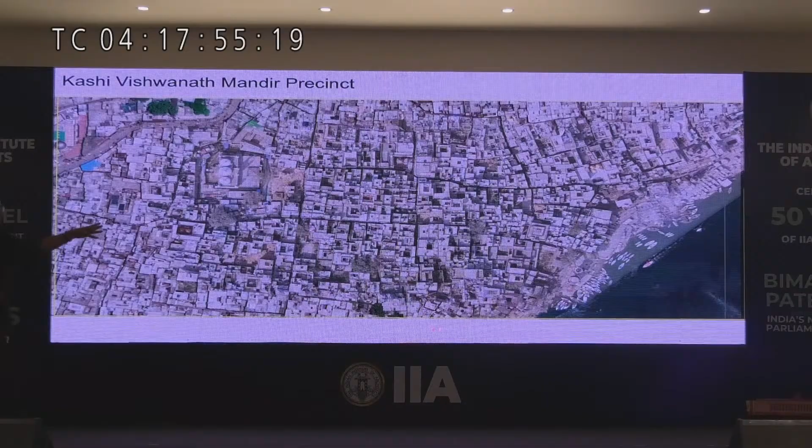That entire stretch is full of dense urban settlement. Now, this dense urban settlement, whenever people had to visit the mandir, they would come either from that street which you see on top, or they would come from these gullies which you can see. If they came by the river, they would come up on these small gullies coming all the way up. So this is a dense walled city type of settlement.

Here is an image, same thing. You can see the mosque, you can see the Gyanvapi Masjid there, you can see the Kashi Vishwanath Mandir down here. Unfortunately, I won't be able to point out to things here. And far there is the Manikarnika Ghat, which is the cremation ghat, which all of you know about. So these are the landmarks here.

This is a view, same view. You can see the masjid on the left hand side here. You can see the Ganges here, and that's the dense settlement that was there. Lots of people visit this mandir, as you all know, but in this dense settlement, dense area, it's more or less impossible for large numbers of people to move easily.

Here is another very important fact about this area. From the Ganges, you have to climb up almost 100 feet, and then you have to drop down 20 feet, and that's where the mandir is. So this is a climb up all the way. The mandir was never supposed to be connected to the river because it's on the other side of the hill, not on this side of the hill. However, there was a great desire to connect the mandir with the river.

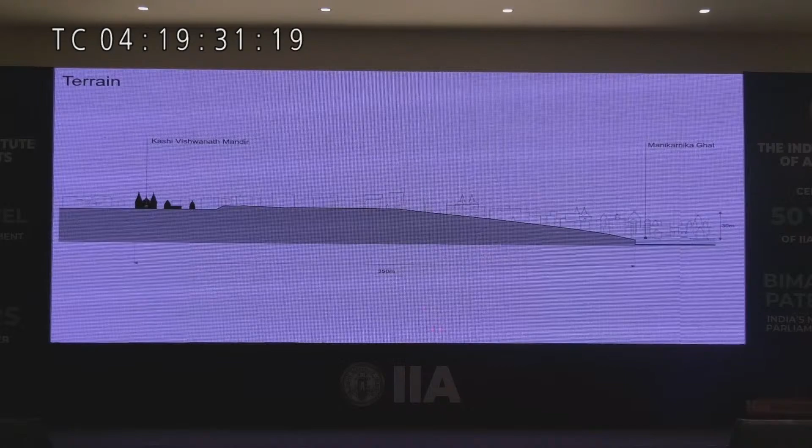It makes it very difficult for people to move. They are very crowded lanes, especially on festival days, it would get totally crowded.

There are lots of priests there, priests everywhere. And there are some high priests and some low priests, priests in the whole place. There are also some itinerant sadhus who are moving through the place. So there's lots of religious people there. Lots of pilgrims come there. And you know very well that this is a large, especially on special festivals, there'll be lots of people here. There's lots of tourists also who come here. That's an attraction for them.

And then there is the mandir, which is the most important aspect of that precinct. And in that area, this must have been the original magnet. You must remember, however, that most of the people living there are not the original residents of that area. Only those who are connected with the temple economy are living there. Most of the original owners have long gone away from the old city because there is very little infrastructure there, and it's really very difficult to live there. So most of the people who are living there are tenants, or they are encroachers in buildings. So this is the character of the people living there.

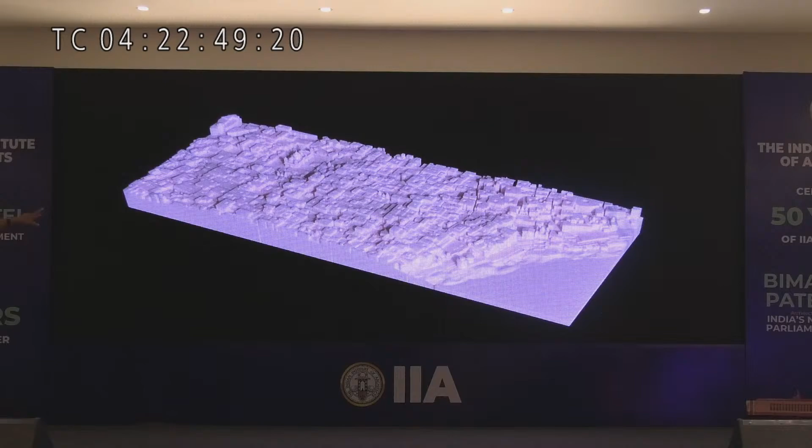And then when we first saw it, we started working on the master plan. This was the original condition in which we found the area, the precinct, and we made a quick 3D printed model of this to understand the area. You can see the river down below, this whole texture, and the mosque there, and this was the main objective here.

Of course, one starts working on sketches and drawings, and I want to say something about the design process at this point. The design process is about coming up with some proposal, then seeing how many faults it has, and then coming up with the second proposal, the third, the fourth, the fifth. This idea that architects sit and imagine a place is not true. Real architects go through an iterative process of coming up with proposal after proposal, criticizing it to find the mistakes, and finally the proposal that you can find no further mistakes with, at least at that point, you decide to agree on.

So the process is very important. In our office, we work like that. Somebody will draw up a sketch like this, it could be anybody. Then everybody stands around in a circle, criticizing it, not in a negative fashion but trying to find the faults in it, saying this is wrong, that won't work, this won't work. Then somebody has to come up with the next proposal, that's the creative portion, which answers some of those faults. Now there will be other faults that have crept in because of answering those, and you keep going through that process, many times.

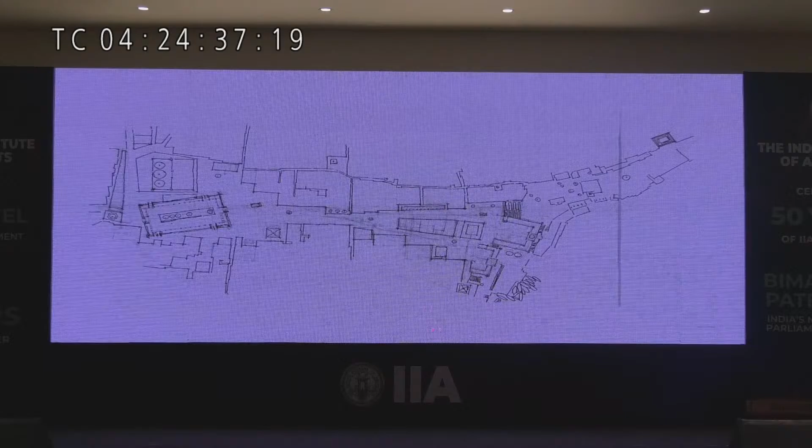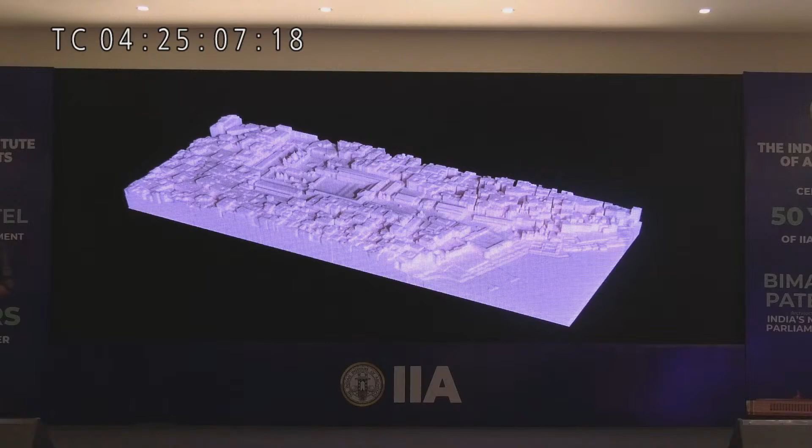Our idea was that we wanted to connect from the river to this place, creating a whole pathway up, and so many such sketches were drawn. Finally we came up with this version, which we'll call version 0. The basic idea was that the mosque was there, and around the temple we created an arcade and a civic plaza in front of it, then a pathway leading all the way down. We produced a model of it, and that's what it looked like, and that's what we got going on it.

But even then, this was our first master plan. Now other people involved in this project, the clients, have to get involved. When they get involved, there's lots of new discussion, so you have to go through the process again.

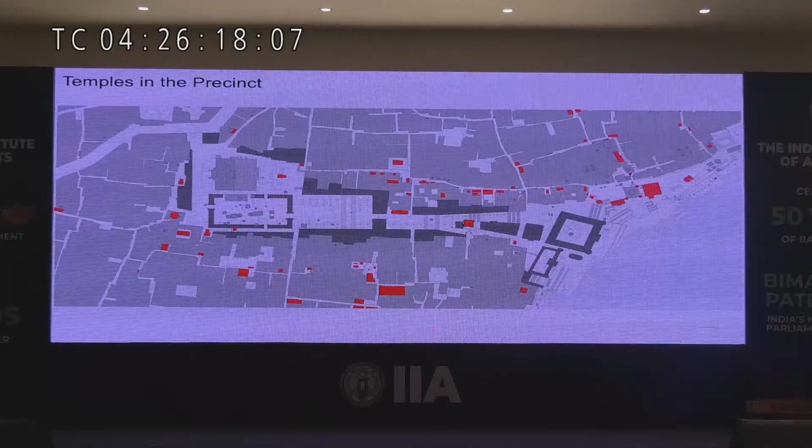So then the master plan had to change, and we came up with version 1. Then we started working with the team of people. There was a wonderful set of people from the Temple Trust and the commissioner there, one Mr. Deepak Agarwal, one Mr. Vishal Singh. They were terrific people, and we started evolving the master plan. You can see we had this, then again came up with the next one, and the next one, and the next one. Every time we are changing something. Now this is something important to keep in mind.

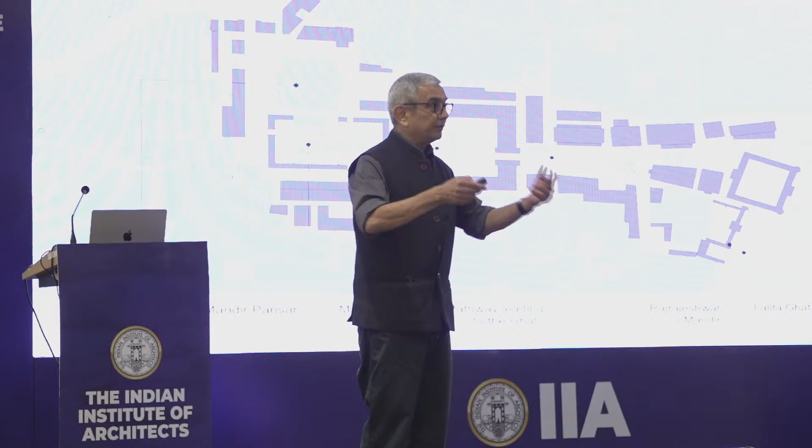An architect's design process is an iterative process of coming up with new proposals again and again. You don't wait till the last day. This whole idea that you analyze everything and then finally come up with a proposal is completely wrong, complete nonsense. Nobody works like that. You start designing on day one. That tells you what data you have to find and what analysis you have to do. As soon as that data and analysis is done, you come up with a second design, which tells you what more data and analysis you need. So this idea that you do a detailed study and analysis and then finally come up with a design at the end of the semester is nonsense. You have to start designing on day one.

With a Google image, you start. Say, let me just check. That will tell you what more data to look for. So this classic idea that you go step by step is completely nonsense.

Anyway, here this is version 5, version 6, and version 7. You can see a big jump from here to here, and then we made some large models like this, constantly trying to figure things out. This was an old building that existed here—not really a building, just a terrace overlooking the place. We were going to use that terrace.

At one point we decided, suppose we get rid of that, what could we do here. So we got rid of that building. You can see it near the ghat here, right near the river. You'll see more of this in detail afterwards, but this is how the master plan evolved—you can see here we removed that.

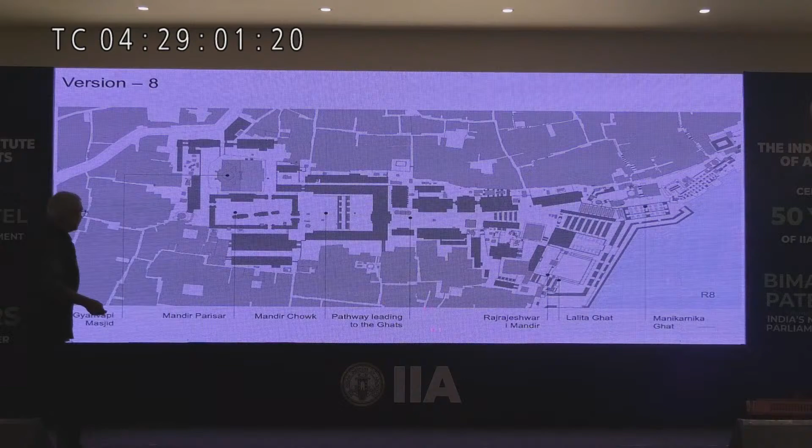Then we made a new model saying the pathway coming down could be much nicer and wider. You can see here it's very tortured—you go from here, past here, into this place. That's not going to work. So we said, how about doing it like this, with a grand set of steps going up.

Then this was removed, and we said, oh no, we could do even better than that. So this was the final version that actually got built. There was a long process of design evolution, and this was the final master plan that's built right now. Some of these versions of the master plan also happened while construction was going on, but that's the way it is.

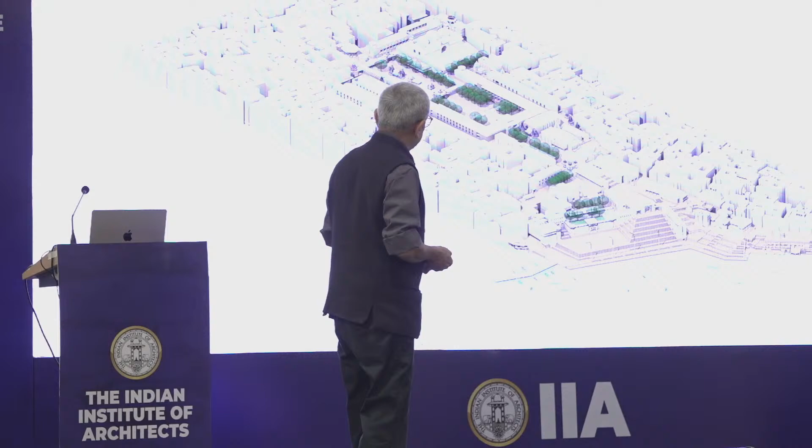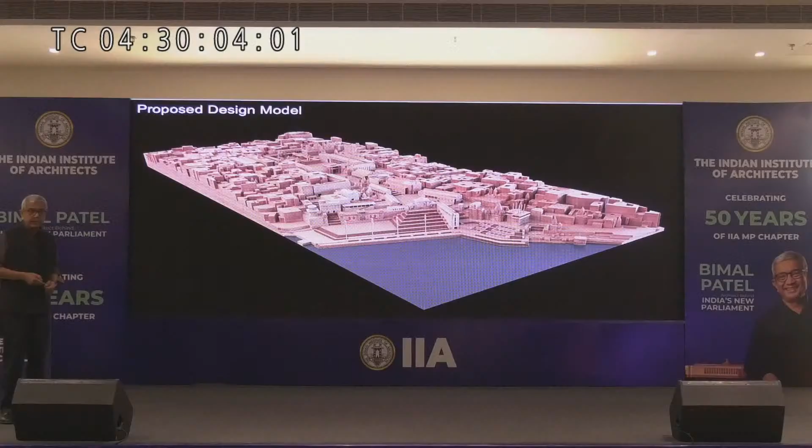And this is a sort of plan drawing of the whole thing. Here's another view of it. This is what it used to be like, and this is what has been proposed in its place. You can see this is a dense agglomeration of buildings near the river, and this is what has been proposed. Here the temple is right next to the mosque—you can see that, and you can see where it is. That's another model we made of this, just to get a sense of what was being done here. And that's the same model.

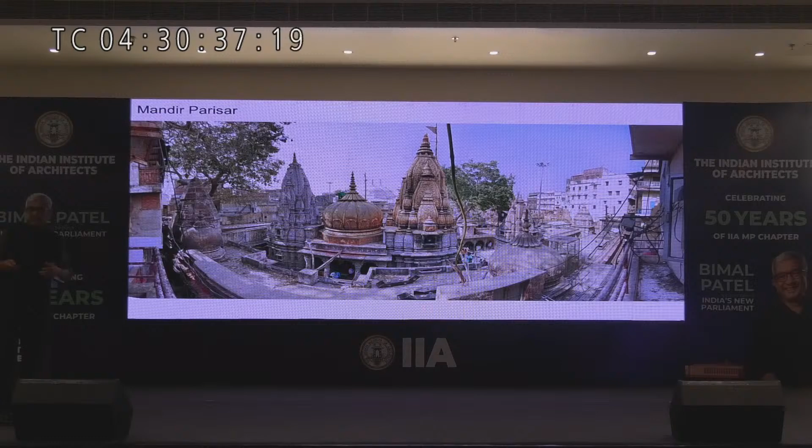Now let me explain the design to you in more detail. First is the Mandir Parisar—this is the area I'm talking about. As you can see, there was this temple, hemmed in on all sides by encroachment and development. There's hardly any space there, and lots of people come here. So we decided that, like many South Indian temples and other temples, we have a tradition of building an arcade all around, creating a sacred space around it. So we took that parisar here.

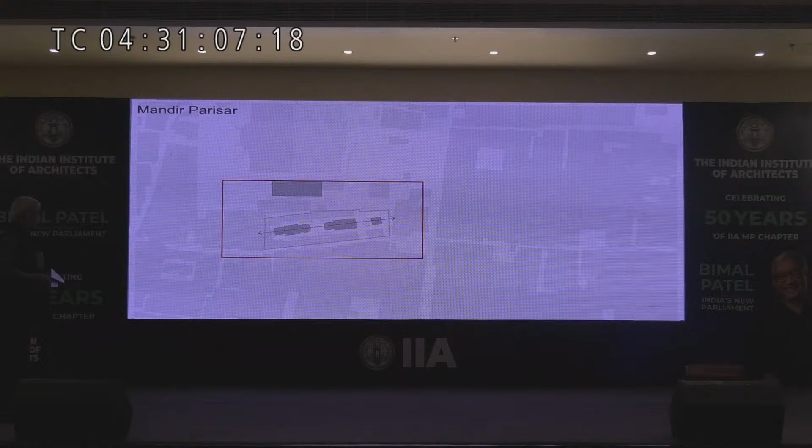You can see in more detail what it was like—this is what was the temple precinct at that time, a small one. We said that's the axis, we take this square here, and we straightened out those two squares. Now this is distorted, so in your mind you have to squeeze it down. We added this so we could take in the well that is there, and then we built a 75 meter by 42 meter arcade around it. It has 4 gates, as you can see—basically an arcade and gates all around.

While we designed the entire morphology, shape and size of this, and the whole concept, we decided to make the temple in a very traditional vocabulary. And traditional temple vocabulary is not something anybody in my office understands.

We would sit together and tell him what proportions we wanted, how we wanted the gate to be, etc. Together we worked out what that would be. You can see here the key plan below.

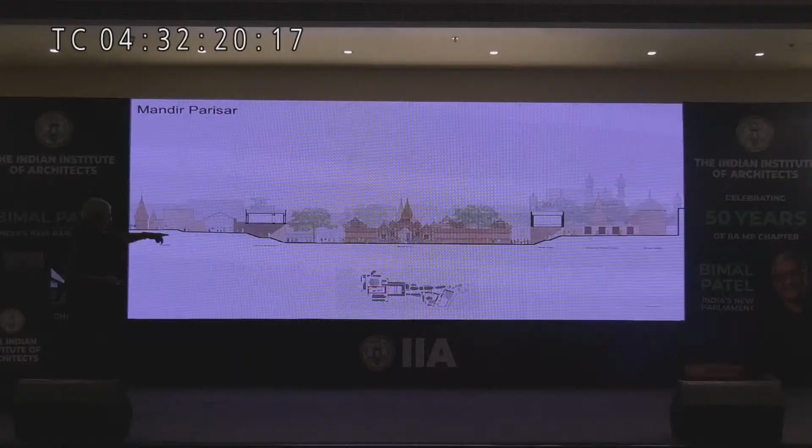So that's the temple inside, and this is the parisar around it. You can see the temple was opened up, and we have a space around it. That's the temple in there, and that's the arcade all around.

Outside the temple's sacred space, we decided to create a civic space. That's the space we're talking about, where people wait. Remember that 20-foot drop we talked about? So you're coming from the river, and you can see the steps here in between.

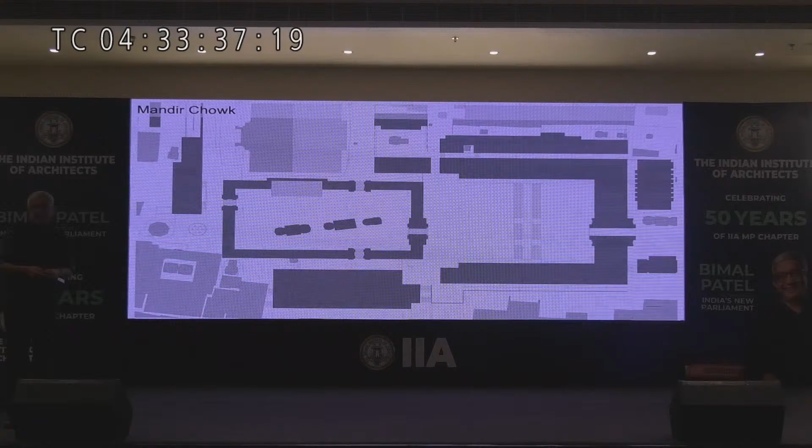So we took that and repeated it on the other side, and made a building around it that forms the negative space. Now, because you're students, let me say this: the space between buildings is more important than the building itself, because as soon as you place two or three buildings together, you have a possibility of shaping the space between them. Very often we forget that it's that negative space which has to be designed.

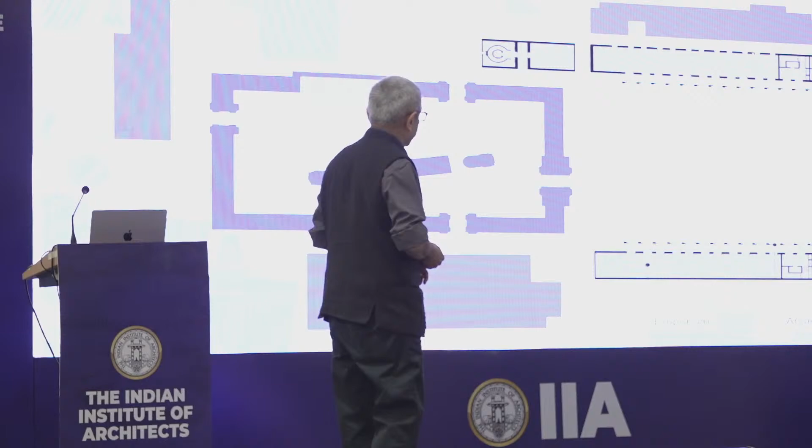That's the building, you can see the ground floor, the first floor, and the top floor. And you can see a section through here, stepping down, with the Mandir Parisar on the left-hand side. Okay, you come down here.

We decided to make this building fairly modern, but with some features connected to the traditional architecture. You can see this is the plaza in front, the civic space in front, and you can see that drop coming down.

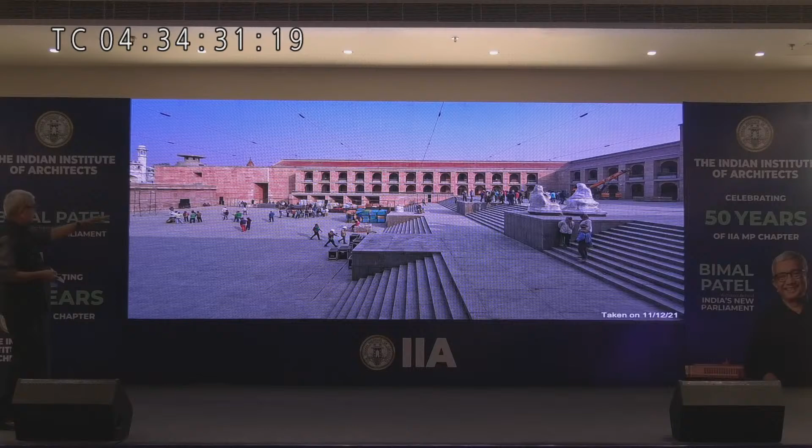This is during construction, so those sculptures are still not opened up. All those cables you see on top are the lighting we did. We didn't want to put poles from below, so we just hung cables across.

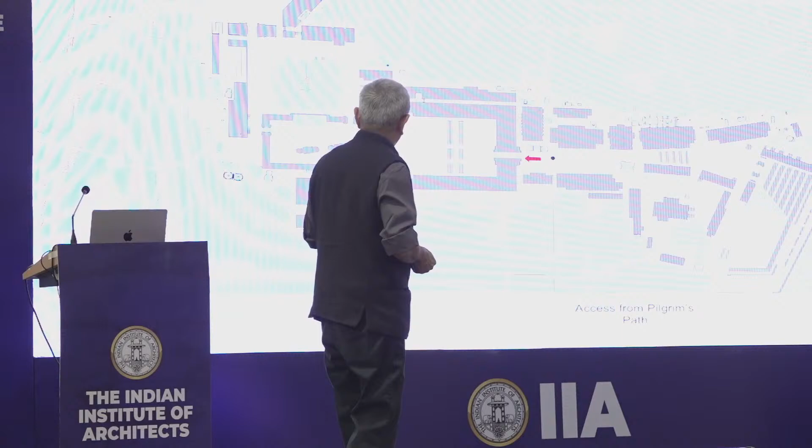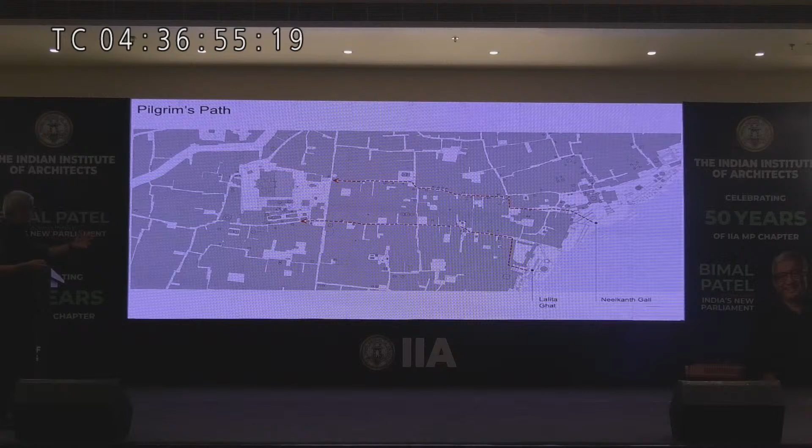Now, the important thing was to structure this whole route from the Ganges. If you came by boat and you came here, you went through these gullies. This was not a pleasant experience at all because these gullies had no infrastructure, they were crowded, messy, and quite dirty.

Essentially, you got down here and went up that Neelkanth Gali, that little gateway, and then into the gullies. Now, that was an experience, but it was not okay for large numbers of people to do that. And you came by boat - even where the boats parked, getting off was quite dangerous. So for older people, this was not a very easy thing to do.

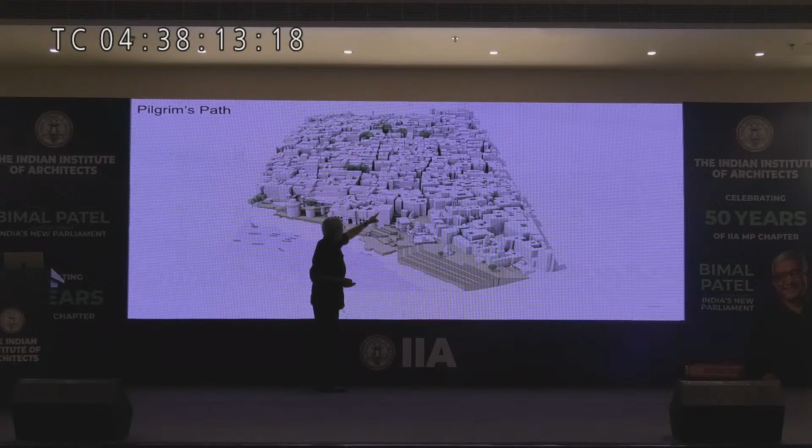So this was what it looked like before. As I told you, here you can see the sewage pumping station. You can see the older structure here, with encroachments on top. This was the gully that you went through.

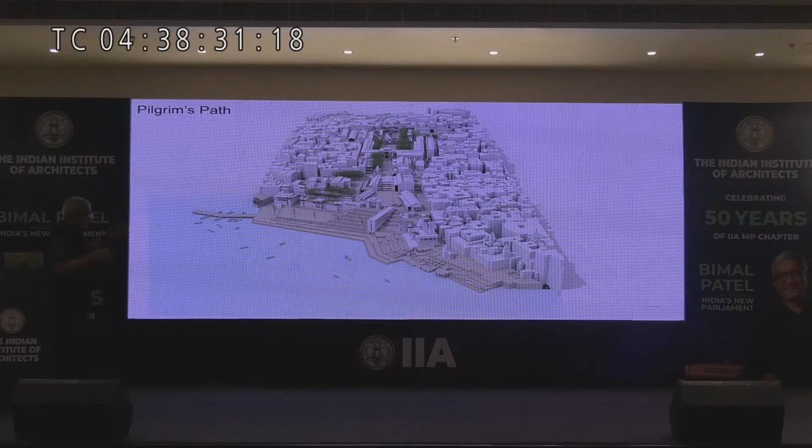So a lot of surgery was required, but this is what we proposed in its place. We said we'd remove the sewage pumping station, open up the building at the back, restore that building quite well. Here in front you can see we create a ghat that leads you up. This structure here is meant to give some privacy to the Manikarnika Ghat, and then you go up all the way.

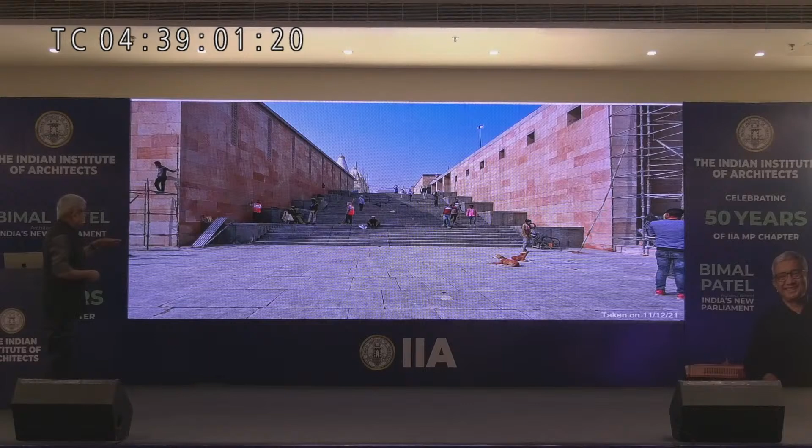These buildings along the route were cultural and civic institutions. So there's a hospice - people come here when they are terminally ill, and that's the last days they spend here. There was a small museum space, a spiritual gallery, a multi-purpose hall, a variety of functions were to be housed here. You can see that section going all the way up.

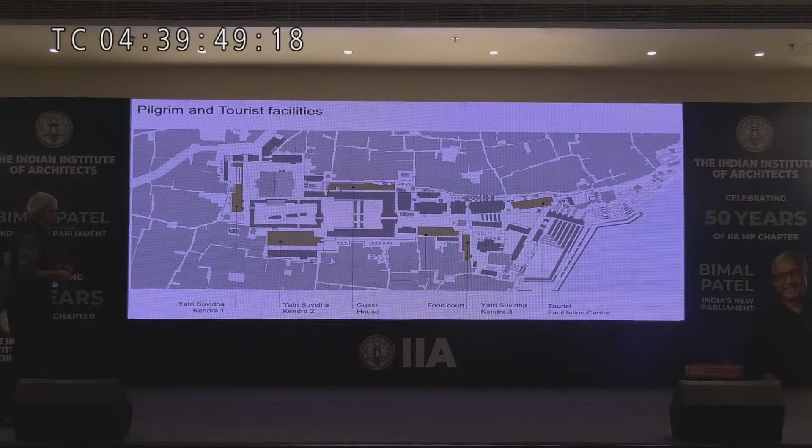There were lots of facilities for pilgrims and tourists that you can see here. Essentially, when people come, they need a place to keep their shoes and bags and mobile phones, etc. So a number of Suvidha Kendras had to be created, a guest house had to be made, a tourist facilitation center, a whole number of things had to be put in.

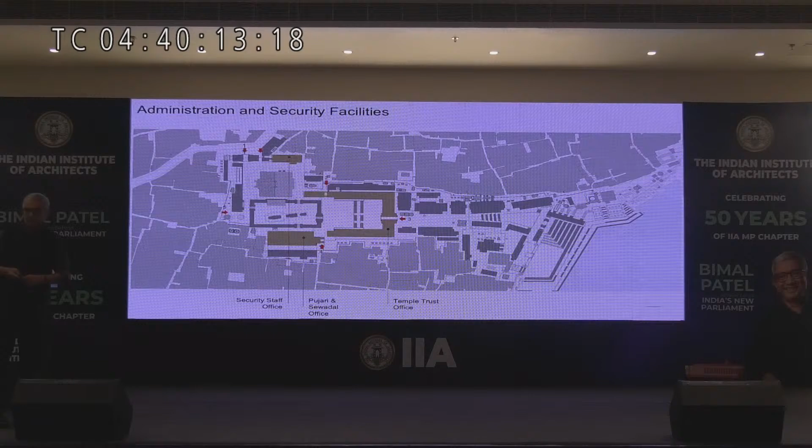And you can see that the whole idea is to place these buildings in such a way that you create a path that leads you up to this area. And these were all the buildings that were done. There were some administration facilities, the temple trust offices, and lots of security offices, etc. And finally, the ghats - so you can see the ghat here, that's Manikarnika, there's Lalita Ghat there.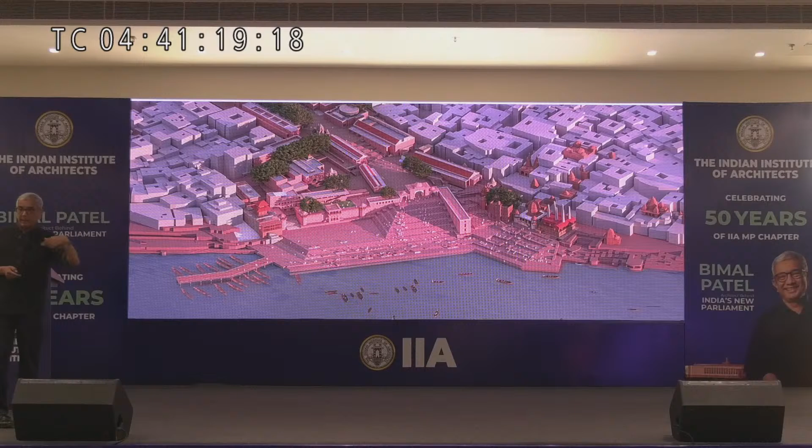Now our ambition was to turn it from that into this - you can see here the Manikarnika Ghat on the right hand side, and instead open up the place, create a big plaza in front, with sort of steps leading up to this place. That structure sticking out actually has a ramp, a wheelchair ramp inside it. So this was the idea, and we thought that once it's done like that, it would look quite grand.

This would become the entrance of the temple, because the temple cannot be seen from the river, nor can you see the river from the temple. So this would be the announcement of the temple.

As you can see, during the construction of this ghat, there was quite a massive effort to put all of this together, and finally that's what got built. Here you can see people climbing up - it's a huge achievement. And here's how it looks when it's lit up.

Yeah. So, thank you. So here it is.

You can see during the monsoon, the level of the Ganges goes up, and the steps are all flooded. You can see so much of it has got submerged, and the boats all come to a higher level. So all of this is below water at one point, and you can come directly to this level by boat at that time.

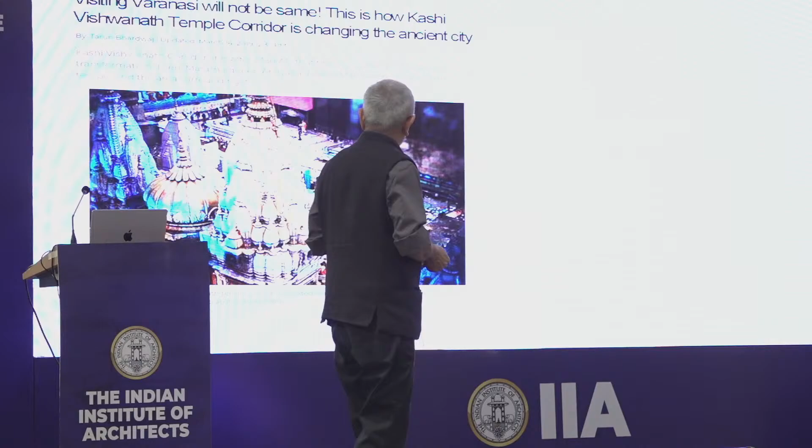Now, of course, this was an intensely political project, a very difficult project in some ways. As you can see, this was propelled by the Prime Minister, and he put his whole force behind this project. And of course there were many, many reactions to this - a lot of people were very upset, wondering whether this project would completely transform Varanasi and change its character.

In India, we are very, very poor at putting information about projects out into the public domain, and that is what often generates a lot of the negative discourse. Of course, projects like this are bound to have some opposition, but in any case, we kept doing surveys of people in the area to find out what they were saying.

There were people who were clearly upset by the changes to the area - some didn't want to leave, some wanted to leave. Here you have Vishal Singh, the CEO, the person who first got the project going - by the way, he's the one who later did the Ayodhya work. You can see various people talking about it.

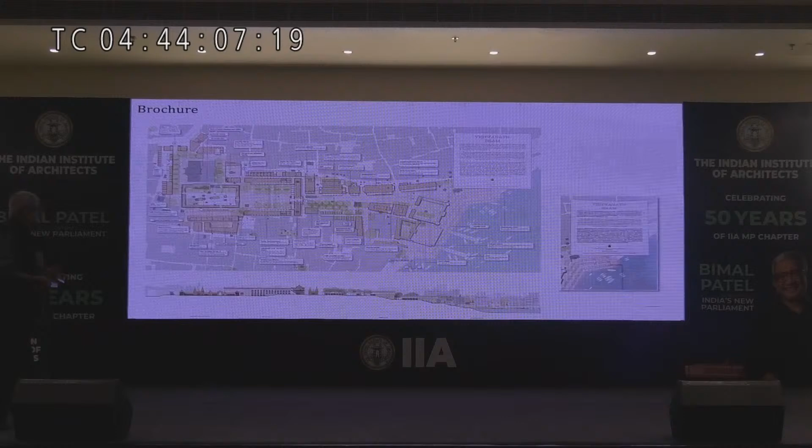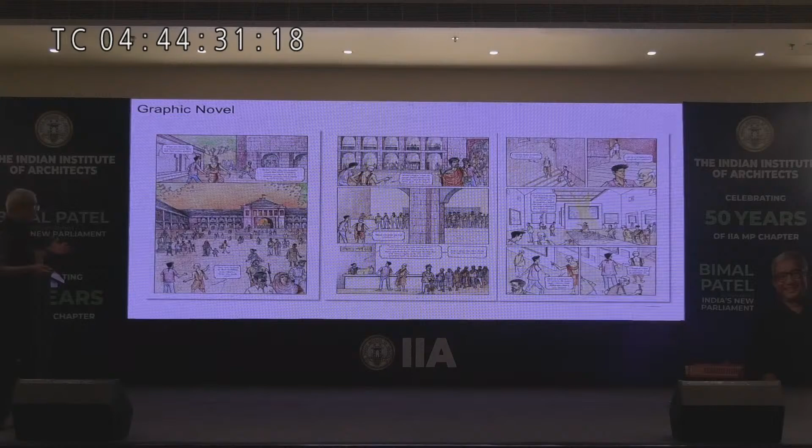So we made our own attempts to explain the project, but it was a lot more difficult. In all our public projects, we make our own effort to put material out - through brochures, exhibitions, films, and we even made a comic book explaining the project. It shows the problem, a young man who goes to see Kashi and finds all this mess, then goes to the other side, takes a dip, and the whole thing has changed. This was also kind of fun to see.

First, the houses in this area had to be purchased, all done by the temple trust. They purchased 300 houses - as I told you, most were owned by absentee landlords who were very happy to sell with the tenant included. The tenants were given a lot of money in compensation, or an alternative accommodation if they wanted. Almost everybody wanted money - not everyone was pleased with this move, but the vast majority were quite happy to take the money and get something better.

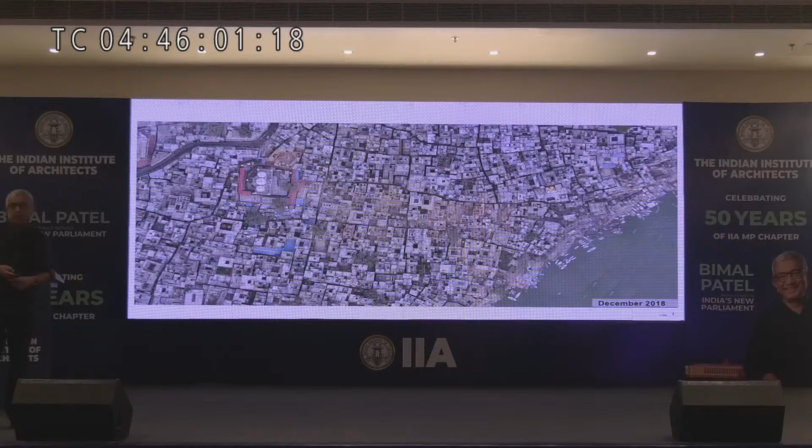Almost 400 crores was spent over 300 houses - that's a lot of money per house, as you can see. There were still some people who really would not want to move because they were tied to the temple economy, but that is the nature of such developments.

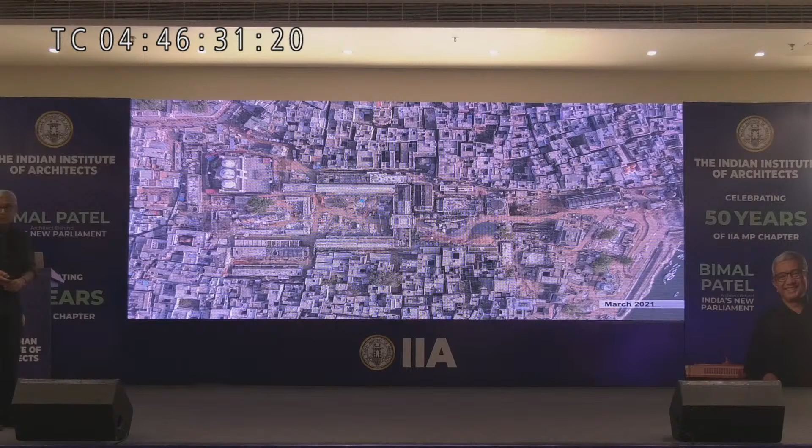You can see January 2019, more demolition, the site being created. Here's March 2019, more demolition. Now construction has started, October 2020. March 2021, construction ongoing - this was quite a massive, incredible site. September 2021, October 2021, still getting constructed, nearing completion. December 2021, and there you are, finally this got done. The ghat was built afterwards, after the inauguration of the temple. Here's some more images of it.

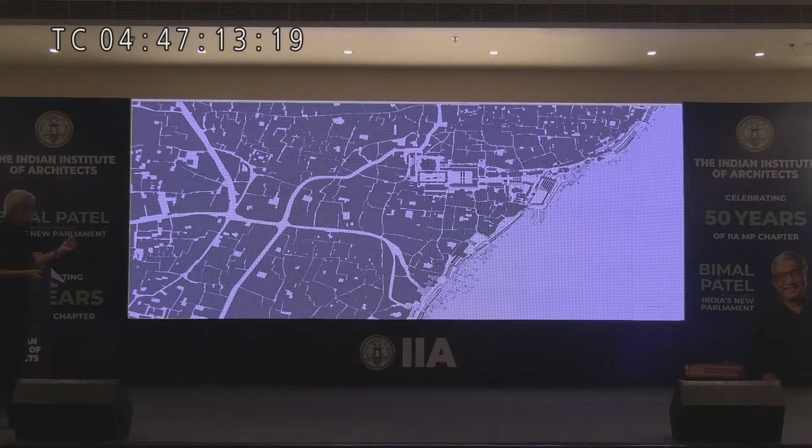It's a project of much significance for Varanasi. But at another level, it's actually a very small thing that you're doing. To get a sense of it, this is what it was, this is what it became. In that whole settlement, this is just about 80,000 square meter area. If you zoom up, it's actually almost invisible in all of Varanasi, but you can see that it's here.

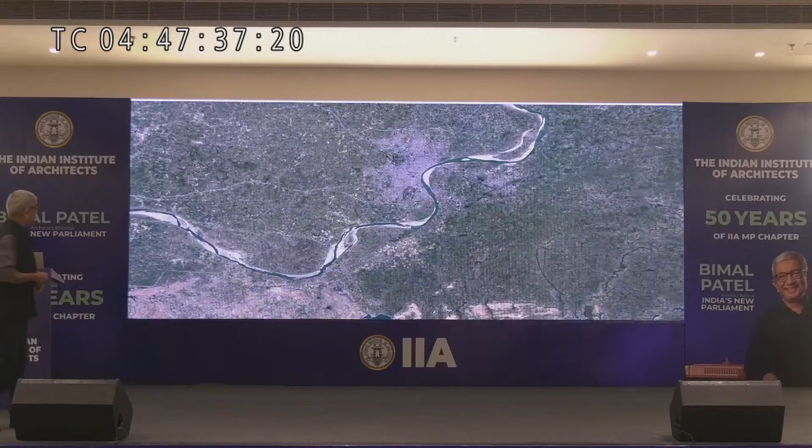Okay, so that's one project. If you have questions.

So can we do the questions of this project first? Maybe that's better, and then... Okay, they want me to do both presentations, so I'll do both presentations and then we'll take questions.

Okay, this one is work that gets done in our urbanism studio, and this is some food for thought for all of you, and especially for the architects, practicing people who are here.

Okay, I'm going to talk about the waste of land in Indian cities. You probably haven't thought about this, but Indian cities are terrific in the amount of land we waste. What do I mean by this? My proposition is the following: that Indian towns and cities waste a lot of land.

Now let's take Ahmedabad. That's a view of Ahmedabad. You can see the riverfront on the left-hand side, the Charles Correa Stadium here, and the metro line in the middle. So it's bang in the middle of the city we are talking about. In the map of Ahmedabad, that red spot is the area I'm talking about, in the middle of Ahmedabad.

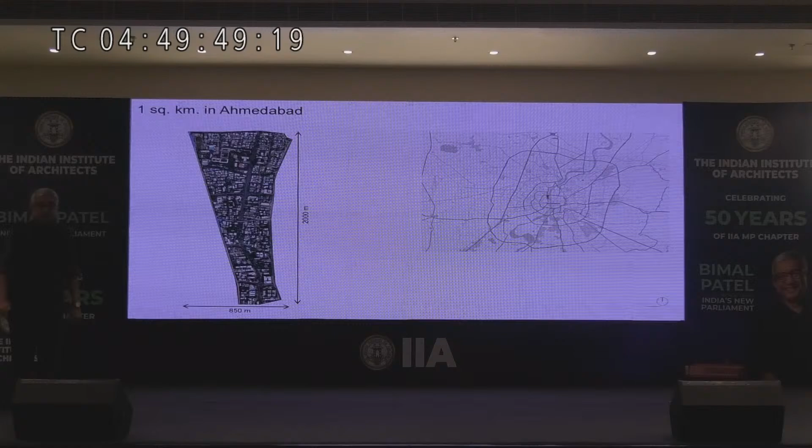When you ask a planner, they'll give you all these things about residential, commercial, this, that, all. That's complete nonsense. Throw it out of the window. You should not even bother with that. Planners shouldn't be doing it, we shouldn't be doing it. If you want to ask land use, you must divide the land use into 3 categories.

The first category of land use is the public realm. Ask a simple question: how much of land is in the public realm? By public realm, I mean streets and parks, that's publicly accessible. Now you would all want more streets and more parks, because that's where we spend a lot of time, and if you have more streets, then your traffic will move better. I saw that Bhopal does not have that much of a traffic issue, but as you grow and get more vehicles, it will become more and more important to have enough land in streets.

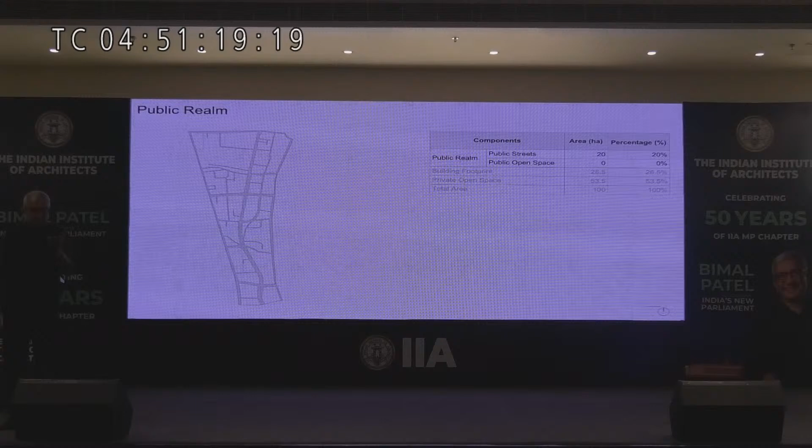Now in Ahmedabad, in this 1 square kilometer, there's no parks, and if you look at the public right of way, 20% of land is used in streets. I don't think this number will change much across any city in India. Anywhere you go in India, they'll tell you 18, 19, 20% of land is in streets, and parks might be 2, 3, 4% in most cities. So we put 20%, and the important thing to keep in mind is that this is the quantity you want to maximize, because the more land there is in streets and parks, the better the city will be. In the case of Ahmedabad, you have 20%. The second category is how much building cover you have.

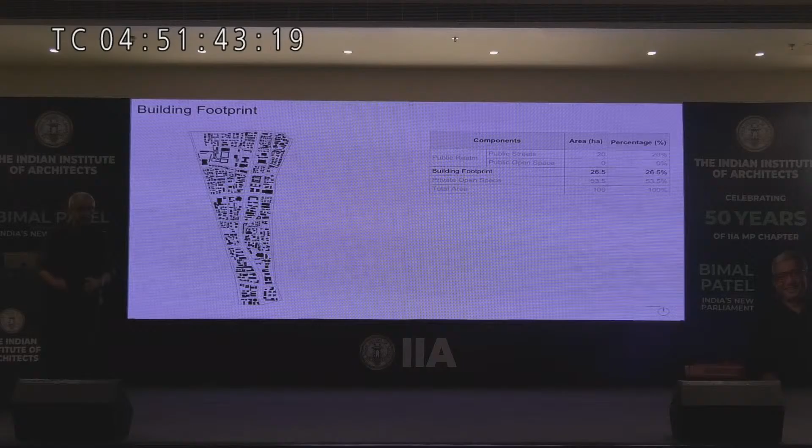By building cover, I mean how much land has been covered up by buildings, the footprint of the building. Why is this important? It's important for 2 or 3 reasons.

One, it tells you how much ground floor space there is in the city. Very immediately, the amount of footprint, building cover, is the amount of ground floor space. Now, ground floor space is something all of us value highly. We want to use it. Why? Because it has a special relationship to the ground, and unlike any other floor, this is the most important floor space. That is why its price is almost always high. So whatever people want a lot of, you should try to maximize. Building cover is something you should maximize just because it's something people really want.

In the case of Ahmedabad, the building cover here is 26%.

Another reason you want more building cover is that the more ground floor space you have, the more floor space you're able to stack up in 1 square kilometer without going too tall. And going too tall is costly, and environmentally costlier too, since you'll have to cool the buildings a lot more. If you're below the treetops, say you want only 5 floors, and you have more floor space on the ground, then in 5 floors you'll stack up more. In a city, people don't want land, they want floor space, because that's the important thing, and you want to maximize the amount of floor space in a city. The more you put into 1 square kilometer, the less you'll have to spread the city out. So if you want compact cities, you also want more building cover.

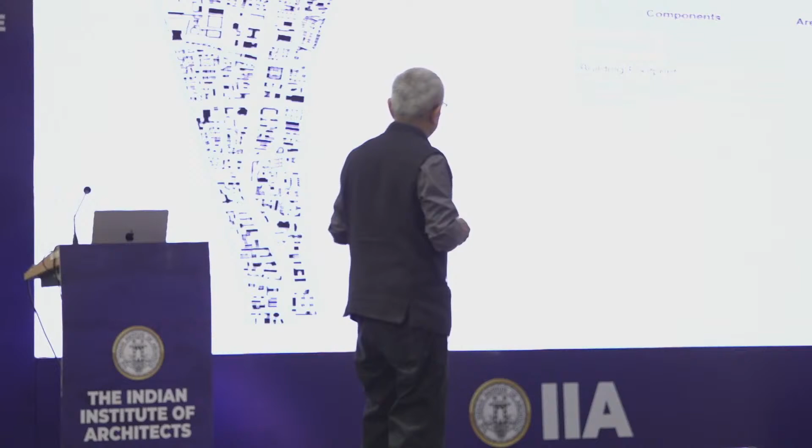So what happens to the remaining 53%? That's over half the land. Over half the land is a very familiar Indian phenomenon — it's the land around buildings inside compound walls. Most of it is left like that because bylaws require you to leave it open. You cannot use it, otherwise people will cover it up with buildings.

So this land is over half. It can be used by the private landowner. It's not publicly accessible, so the public doesn't benefit from it. The private fellow benefits, but does he really? It's open land within compounds, required by regulations. Much of it is very narrow, much of it is not properly shaped, because you cannot shape land properly like this. It can only be used very poorly. And that is what I call the waste of Indian cities — land that's open, cut up into small pieces, fragmented, and over half our land cannot be used very well.

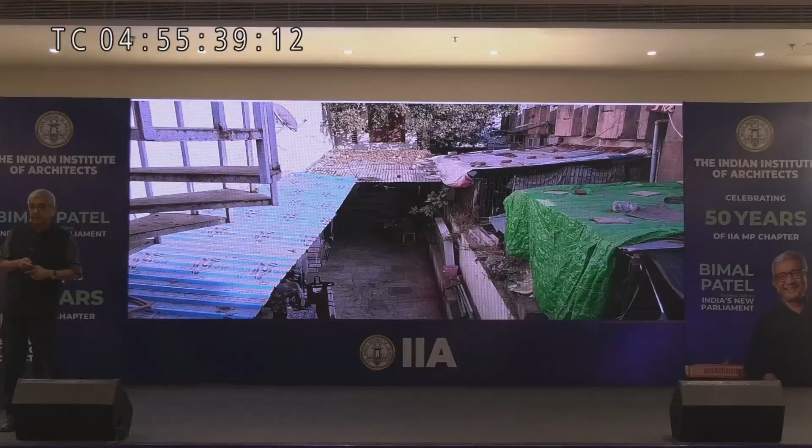So you see, if you look at a view like that, that's the shape of all of that land. And most of it, when it is used, is used in this manner — between 2 buildings, people try to use it in some way, but they can't really use it well. They use it for some storage. You can hardly grow any trees here. So who this is useful for is a question you keep asking. The front margin, neither belonging to the road nor to the building, you can't really use it well. You make some steps, landscape people do something, but it doesn't really work — little patches of land where cars get parked. This is all fragmented land, and it amounts to more than half.

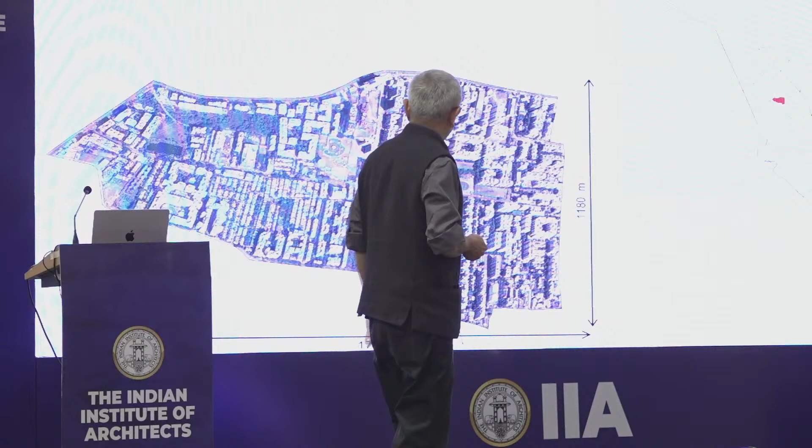Private open space is 62%, and this is all fragmented land there, not much use. If you take Pune, 1 square kilometer in Pune, you have 13% in streets, 30% in building footprints, and 57% in all this space around. Think about it—how much land is suboptimally used?

If you take Jabalpur, you get the same story: 21% in streets, 30% in building cover, and 49-50% in residual space. So it is fair to say that in Indian cities, land use is as follows—don't ever bother with residential, commercial categories, that's traditional junk which has been coming down and you might as well get rid of it. You get 20-25% in public realm, 20-25% in building footprint, and 50-60% in residual space. This is what you have.

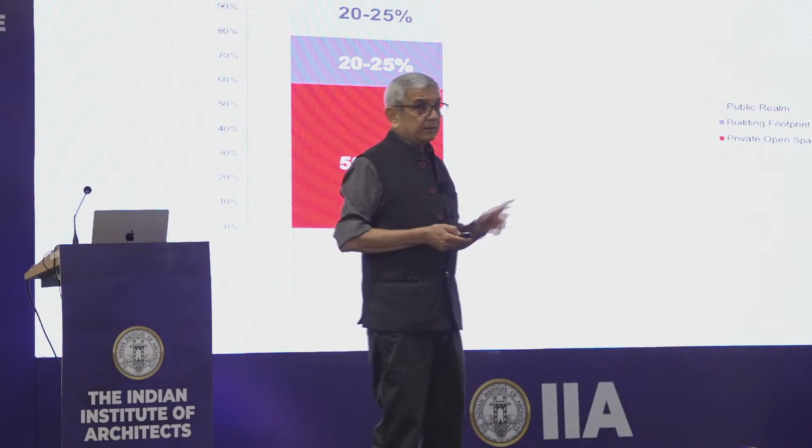Now, well-functioning cities abroad are very different. Take New York—it's a very dense city. In 1 square kilometer in New York, guess what? It has 45% in streets and parks, twice what we have. It has 46% in building cover and only 8% in residual open space. They use land very, very efficiently.

San Francisco has got nothing to do with high-rise or low-rise. If you take the in-between area, between high-rise and low-rise, it's 35% in streets and parks, 55% in building cover, and 9% in space between buildings. If you take Hong Kong, it's the same sort of story—35%, 48% in building cover, 16%. This is hilly terrain, that's why it's 16, otherwise it would be less.

This is a lovely low-rise city. You can see in this entire low-rise city, you have 39-40% in streets and parks. Building footprint has 40%, 19% in open spaces, and all those open spaces are well-shaped—you can see they're all in the middle of blocks, larger spaces.

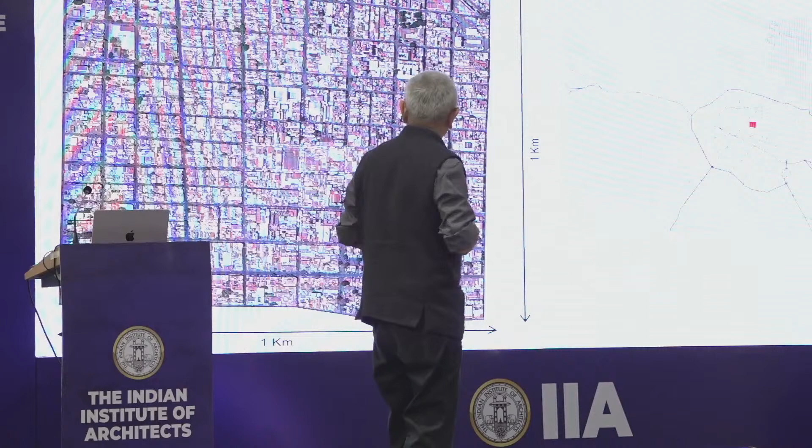It's got nothing to do with rich or poor. This is Mexico, a very, very poor neighborhood. You can see it looks like this—ground plus 2, but very efficiently packing 26% in streets, 69% in building footprints, and only 4.8% left over.

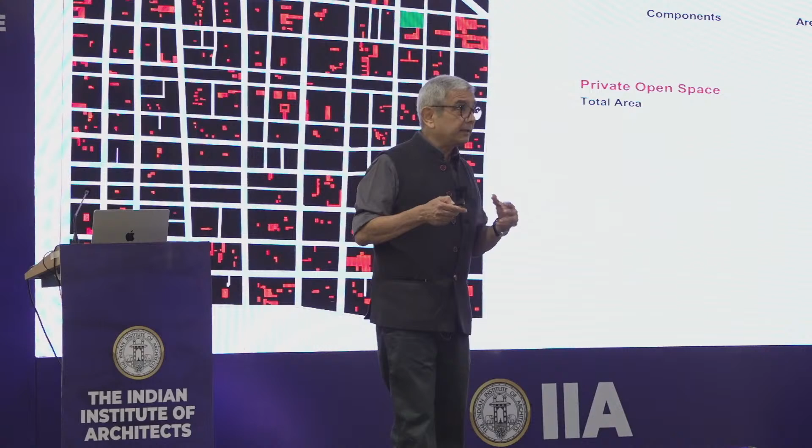If we use land at the current rate, our cities will expand a lot more. If we were to use it more efficiently, they won't expand. So Bhopal will start cutting out its forests much faster if it has this pattern of land use.

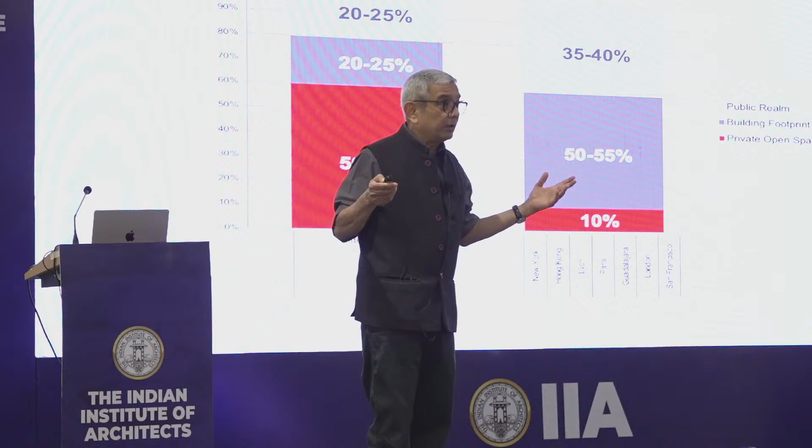So we can say that in well-functioning cities, 35-40% is in the public realm. No wonder their streets and parks seem very nice. How many of you have been abroad? Quite a few of you have. So when you go to cities abroad, you might even have seen them on film—there's great streets, there's great...

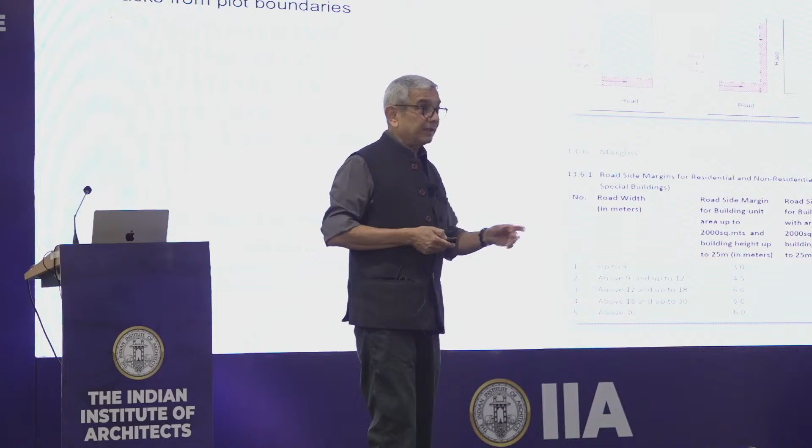What causes the waste of land? Indian planning—you have building bylaws. These are Gujarat building bylaws, and architects are required to design according to these rules. These rules require you to leave land open inside your plot for a variety of reasons. From plot boundaries, you're supposed to leave setbacks. Sometimes they depend on the height of the building, sometimes on the width of the street. You ask me why, and if you can answer why this makes any sense, there's an award for you. But they require all sorts of margins.

Setbacks from other buildings—if you have a large plot with two buildings, they'll say you must put 12 meters between them. Then, if there's a nala passing by, they'll say we've got to leave space from the nala or from the river. Then, inside the plot, if you have a road, they will tell you how much road to leave, as if you will deliberately not leave a road that is needed by you.

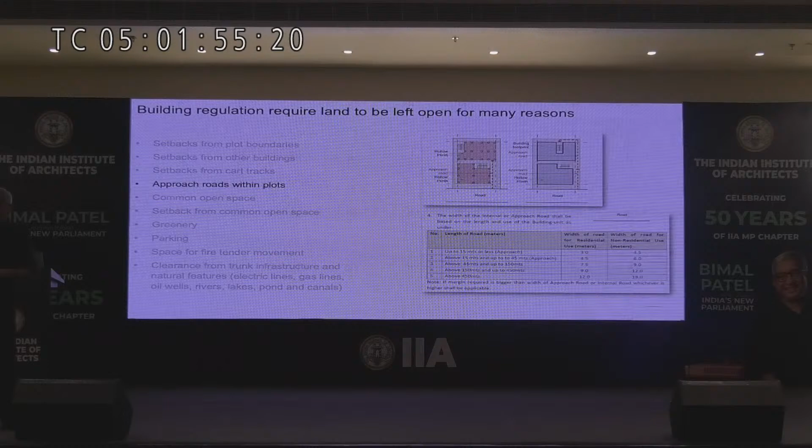Then they will require you to put some common open space. What planners and government should worry about is public space, not what you do inside your plot. Inside your plot, you may leave open space or may not, but you must have more land overall. Setback from common open space, greenery—sometimes bylaws require you to leave some space open for greenery.

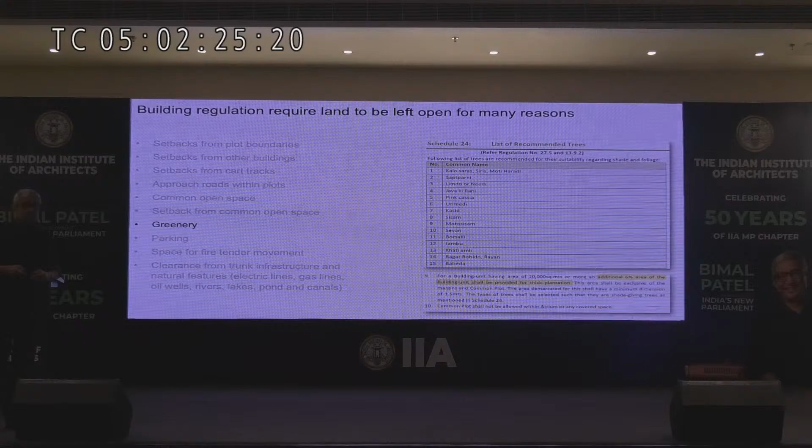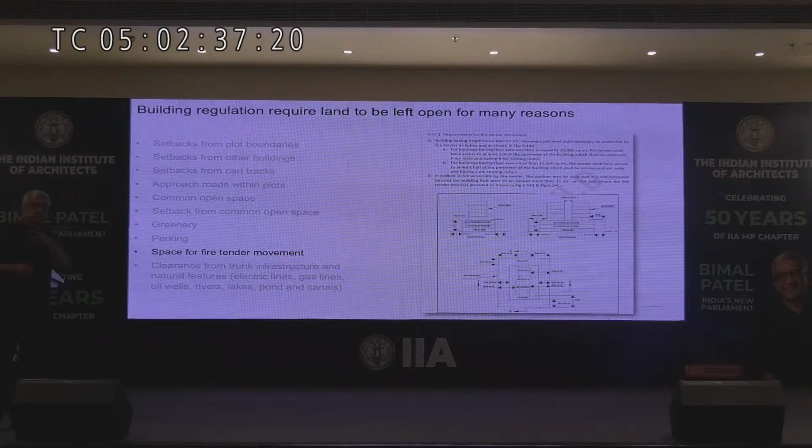Come along, man, just make parks instead of doing this. Okay? Parking, fire tender movement - this is another funny one, because you leave all this space, and it almost always is full of parking, so there's no way a fire tender will ever be able to move. And clearance from trunk infrastructure, that's another reason. Now, sometimes, as if this were not enough, even the coverage is restricted, and we take great pride in saying that there is very little coverage.

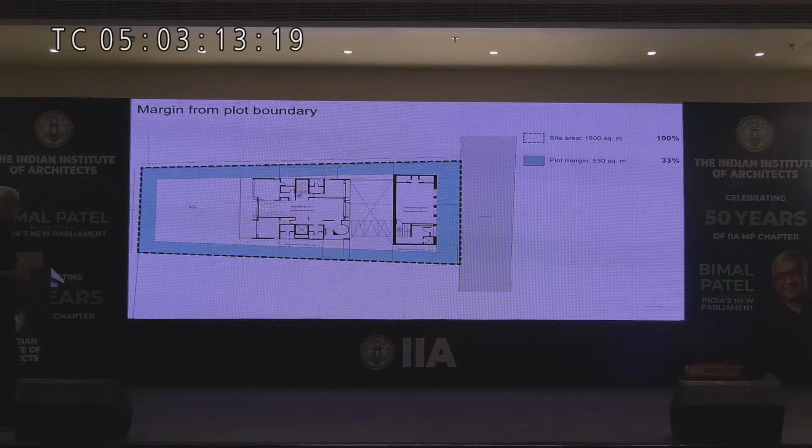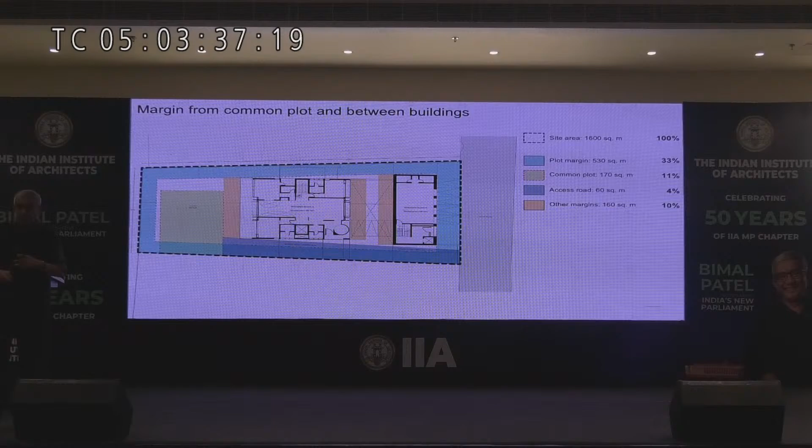Now how do these play out on a plot? This is the case of Ahmedabad. Here is a house that we designed, and this is what the house design looks like. It looks nice, khulla khulla, but that's not because he wanted it - it's because, from the 100% plot, 33% went away first in margins. Then we had to leave some common open plot, so another 11% gone. We tried to overlap as much as possible. Then an approach road had to be given, and we overlapped it with the margin, so we managed to get 4% more. Then some space has to be left between open, and after all of this, some parking space had to be provided.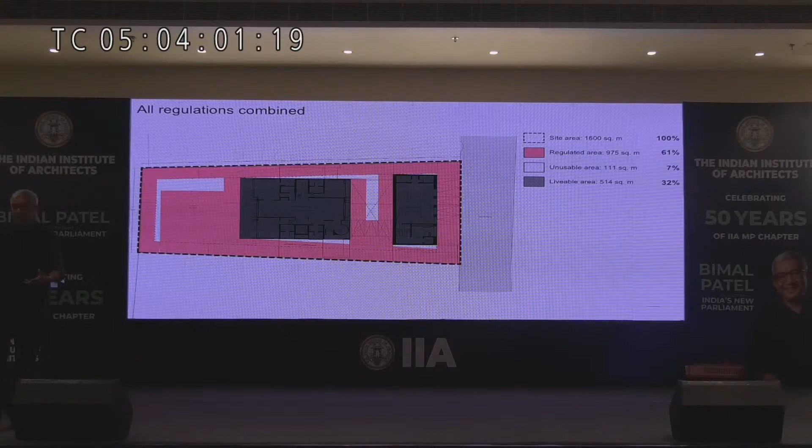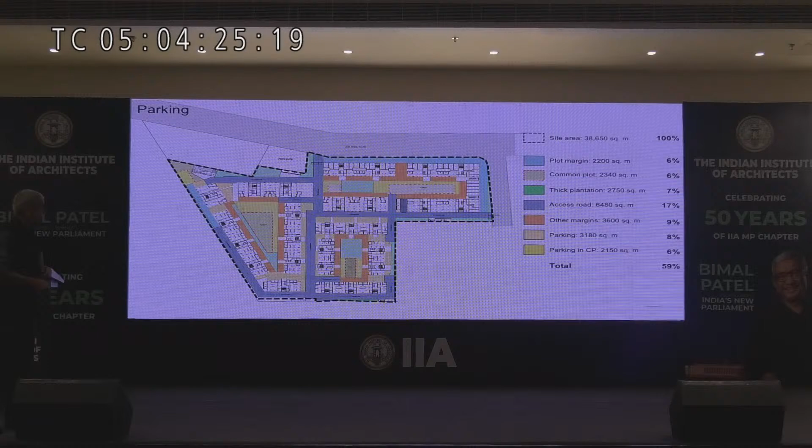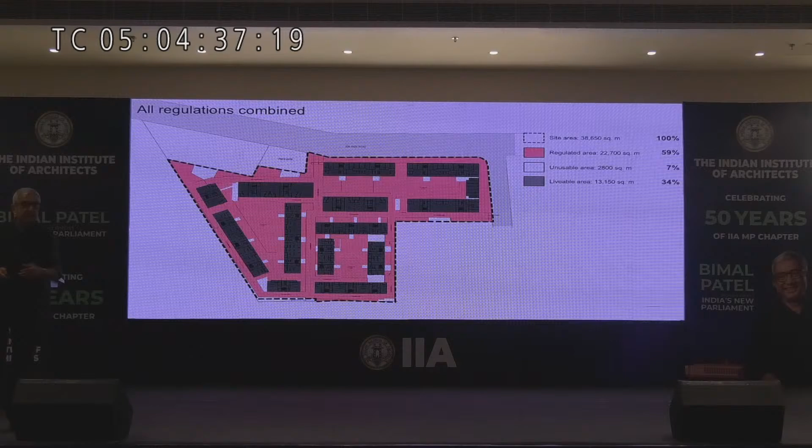Now, I'm not saying all of this is a waste, but I think there has to be a better way of doing this. One way or the other, this is not working.

Now architects have become like lawyers. They have to read these complicated building bylaws, find some loopholes, try to exploit loopholes. You must know all these detailed regulations. Loopholes have to be found. Find some convoluted shape that will fit inside these loopholes and the bylaws. Our creativity is used entirely in managing regulations, not in actually designing buildings.

This is completely nonsense, and this is a creation of Indian planning. It's got nothing to do with reality, because the world over, people make buildings and they have the same problem. They also have fire problems, they also have light and ventilation problems, they also have traffic problems, they also have parking problems.

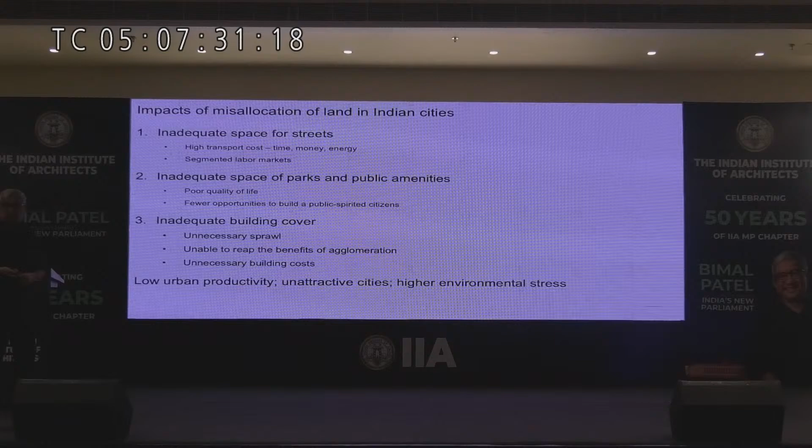Can something be done to improve this? Of course it can be done. We have a rule - we never criticize something unless we have an answer for how to improve it, and improve it in a way that makes sense from all points of view, not just one, to be able to answer every question that somebody might ask. So I can't give you a full presentation of that.

All of this is complicated, but we say that individually trying to make these rules efficient is never going to work. Every time you tell somebody this is a rule - for example, why do we ask for common open space - they say, we don't know, but this rule has come from olden times. Like we say for everything, our ancestors have decided. Instead of throwing away things that don't make sense, we say because ancestors decided it, there must be something sensible in it. No - if you can't see the sense in it, change it.

The ancestors may have done it for their time, but we have to do it for our time, and we have to follow reason and rationale in doing this. So instead of trying to repair this book, we say, remove the old system, bring in a new system. It's a very simple system.

We must, instead of writing rules on a drawing, draw what land has to be left open. Just that, nothing else. As soon as you do that—so if you were in an already built up area and you wanted to write building regulations in a different way, how would you do it?

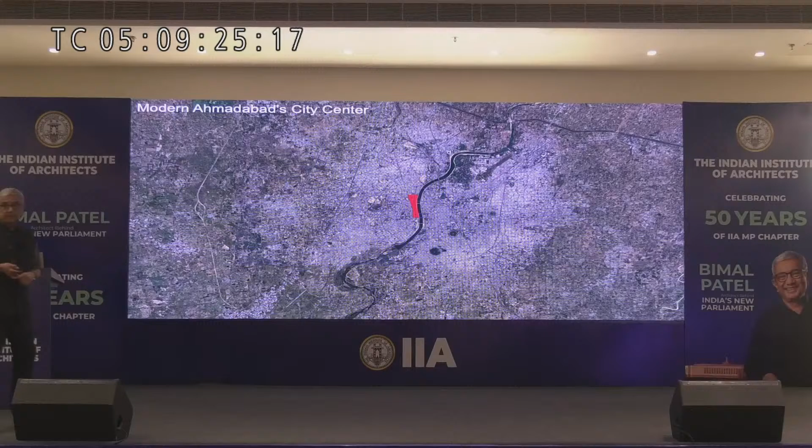So I take Ahmedabad again, and I take this area in the middle of Ahmedabad, which we did a plan for. This is already a built up area. We made a plan for this area and for the densification of this area. You can see there's very little land in streets and very little land in parks. Parks we can't create, but streets we wanted to improve simultaneously.

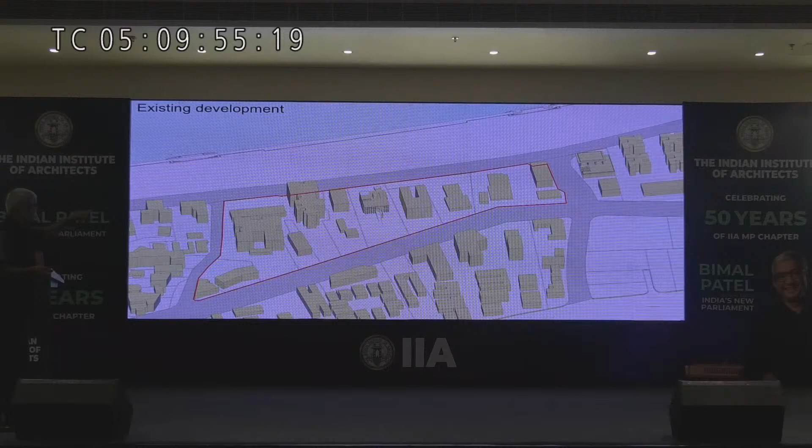So we took that and zoomed into this area. You come up here, you can see the Mill Owners' Association building, that's the center of Ahmedabad where this is. So we drew up lines like this, so you get more streets. First you demarcate the streets, then you put this in here, then you demarcate the setbacks. Once the setbacks are set, this is the coverage that people get after the setback.

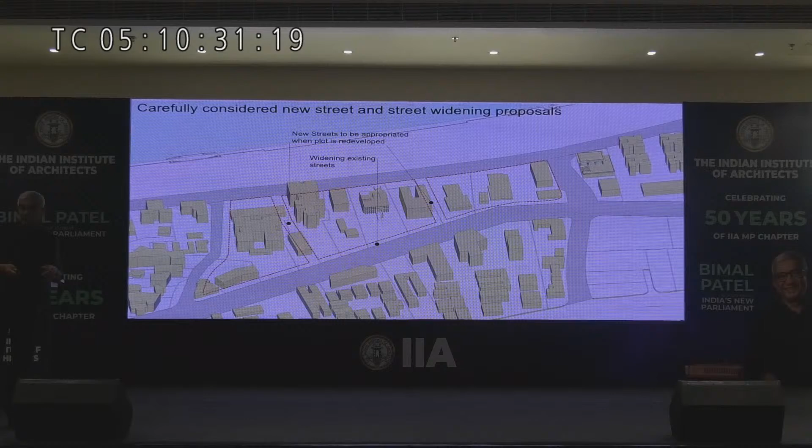Now this coverage you are allowed to fill up fully, nothing else, because I've taken away people's land for streets. I've taken a lot of the front margin away. Wherever there is a neighboring property, I've asked for a setback. The rest of the places I've asked for no setback. In addition to that, I don't want any other thing. So this is the coverage.

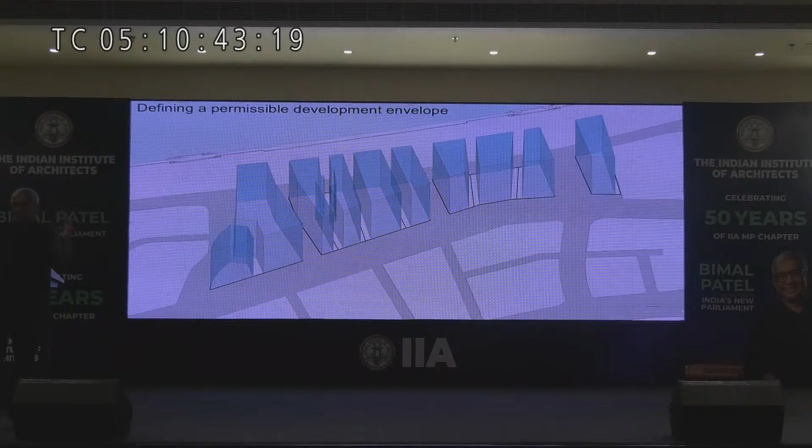Then we define a height. This is the envelope, the volume within which you have to design. This is the amount of FSI you are allowed. Now nobody builds a building like this because you cannot build many floors of this large size. On the ground floor you might have full floors, but as you go up you get towers. Everybody will design buildings like this, and eventually this will become this.

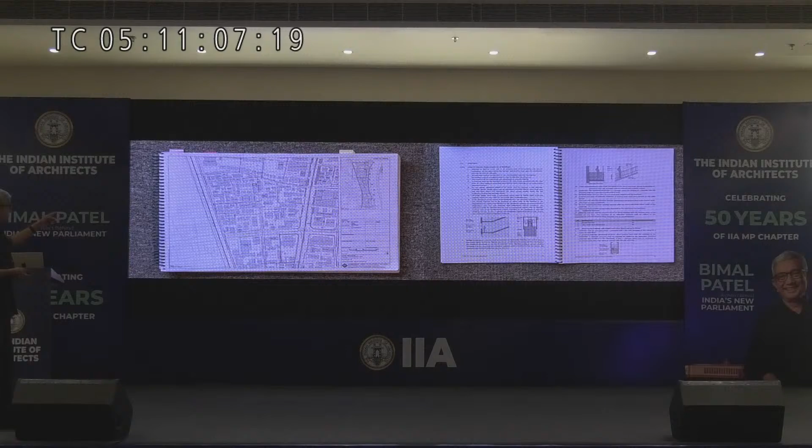Now, actually, the bylaws book will be on one side a set of drawings. Every plot has been drawn up, so you know exactly—nobody has to now calculate. There's no text rules regarding margin, setback. There will be some text rules regarding standards, many other things, you will need a rule book. But one-third of the rule book that deals with the shape and size of buildings is thrown out, and you have instead a set of drawings.

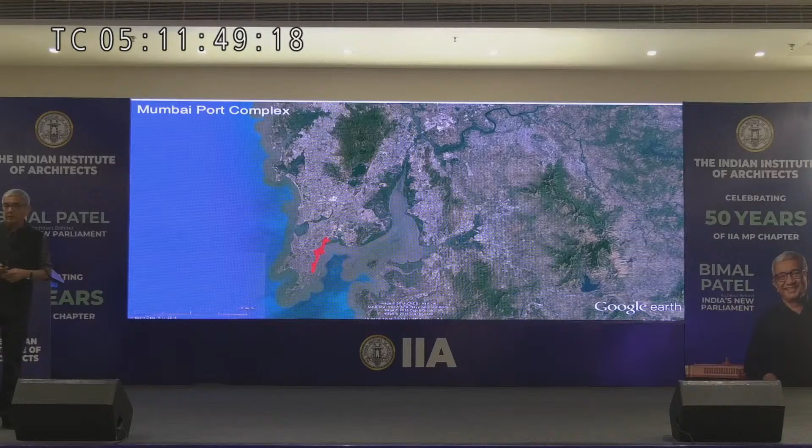If you were in greenfield areas, this would become even easier. We had this chance when we were working in Mumbai. This is the port of Mumbai. The port is now not used, so that land has to be plotted and redeveloped. In this area we made a street network of this sort. Then these were the blocks, 100 meter by 100 meter blocks, in which these were the plots that were plotted.

And in this we said these are the setbacks, you can see that's clearly drawn up. Once a setback is drawn, you say this is the envelope, the building volume within which you can build. So the envelope is already fixed. This is the amount of floor space everybody can build in this area. If they were to stack it up, it would look like this.

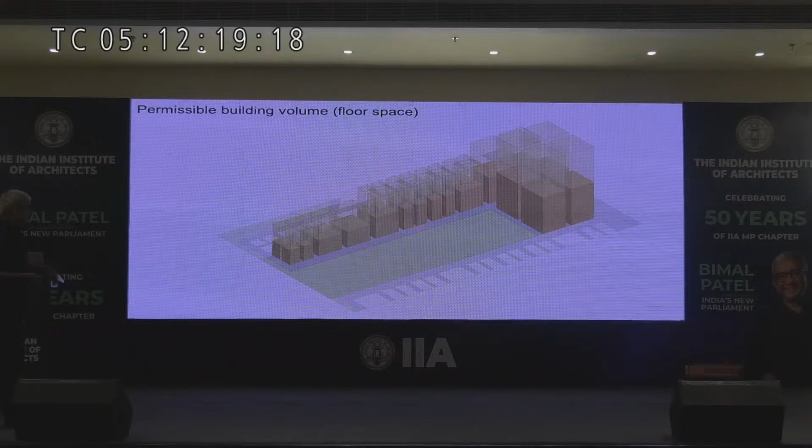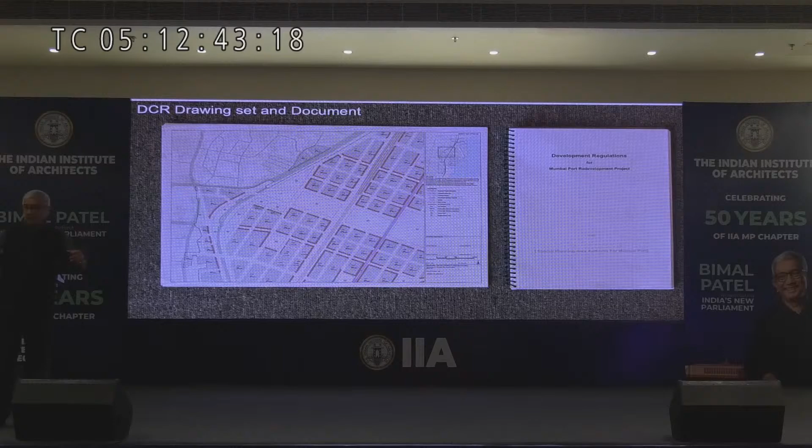Actually, people will make a variety of buildings of this sort. So all that finding of loopholes and understanding textual rules, none of this has to be done. And that would be a possible outcome. Once again, you can see on the left-hand side. I'm crunching a lot of things into this one, but I think at least the architects will understand very clearly what I'm trying to say here. That's that. Thank you very much.